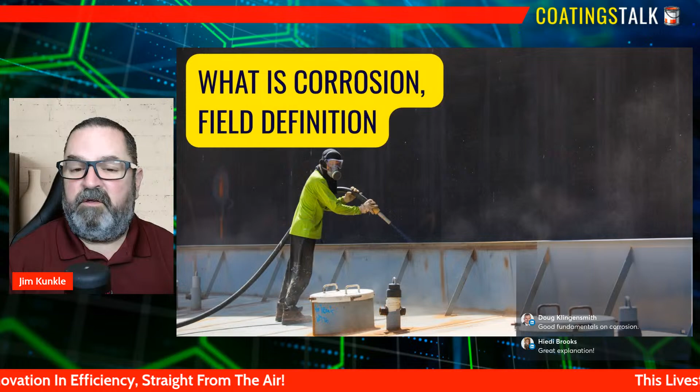Corrosion doesn't just happen, it happens when conditions allow it. And when field teams understand those conditions, they gain the ability to intervene early and effectively. Most importantly, corrosion is manageable, even in aggressive environments, even on aging infrastructure. The combination of trained eyes, good documentation, and disciplined maintenance practices keeps assets safe and operational.

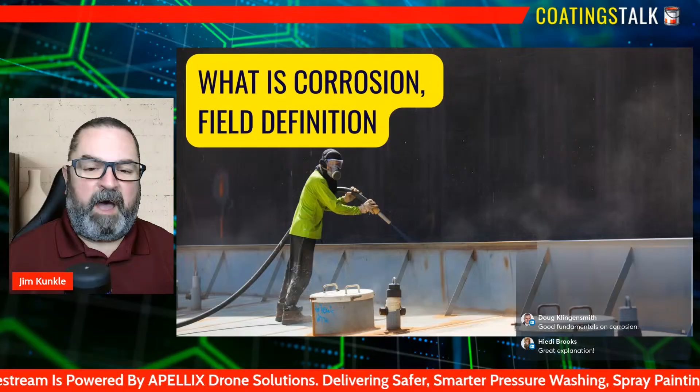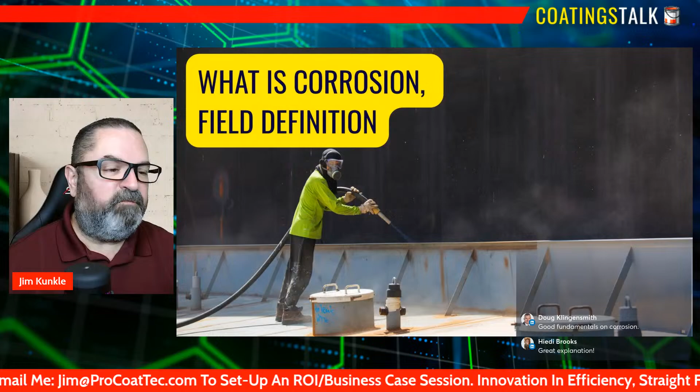Field level understanding turns corrosion from a crisis into a control variable. It empowers frontline professionals to protect the integrity of pipelines, tanks, bridges, and industrial systems with confidence. When teams recognize that corrosion is not fate, but a process they can influence, they become the strongest line of defense in asset preservation. So I'm going to cover what I consider my top 3 corrosion mechanisms encountered in the field.

The first one I want to talk about is uniform corrosion, and this is widespread surface attack. Uniform corrosion is one of the most common and most easily recognized forms of corrosion in the field, but it's also one of the most underestimated.

This mechanism occurs when the entire exposed surface of a metal corrodes roughly at the same rate, and it creates a widespread, even layer of metal loss. To the untrained eye, it may look like a simple, uniform rust film and nothing dramatic, nothing localized, nothing alarming, but that broad, consistent attack is quietly thinning the metal everywhere at once.

Over time, this steady reduction of wall thickness can compromise structural integrity. It can reduce pressure handling capabilities and also shorten the service life of tanks, pipes, and other critical components.

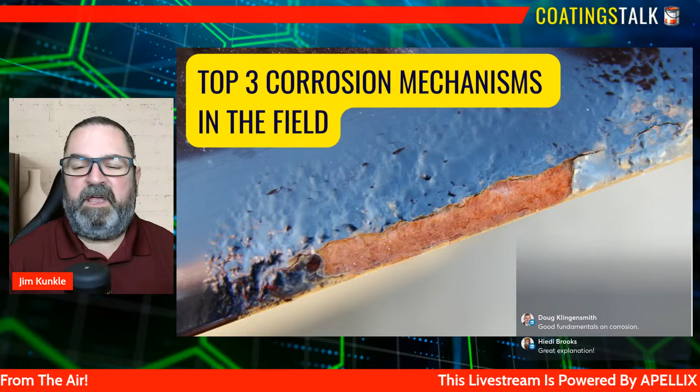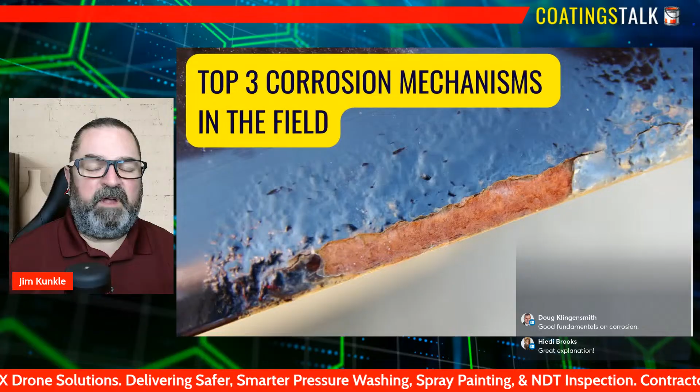What makes localized corrosion especially challenging in the field is how easy it is to escape detection. Pitting can form behind coatings, under insulation, behind gaskets, and in tight joints where inspectors can't easily see it or probe. Crevice corrosion often develops where two surfaces meet—lap joints, bolted connections, clamps, or deposits sitting on the metal. These areas restrict oxygen flow, creating a chemical imbalance that drives rapid attack. By the time visible signs appear, the damage may already be severe, with pits penetrating deeply or crevices undermining structural integrity.

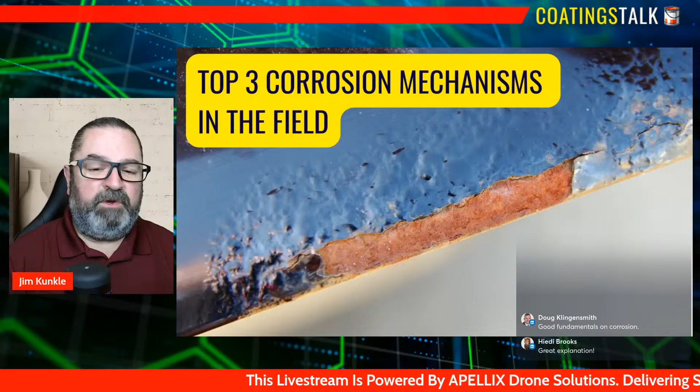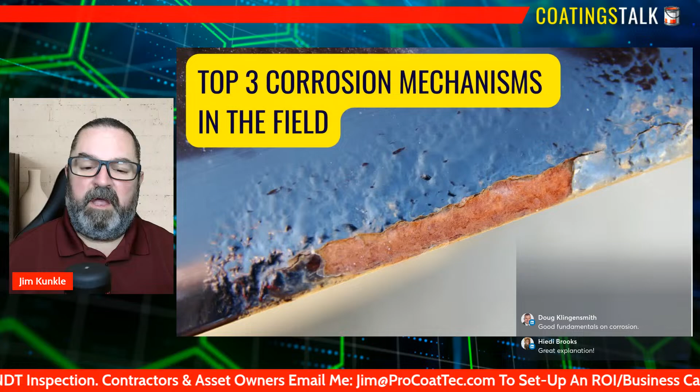For field professionals, understanding localized corrosion means adopting a mindset of vigilance. It requires knowing where these hidden threats tend to form, using the right inspection tools, and recognizing subtle indicators such as coating blisters, rust staining, or unexpected moisture. Localized corrosion may start small, but its consequences can be enormous, from leaks and unplanned shutdowns to catastrophic failures. When frontline teams understand how and where it forms, they gain the ability to catch these silent attackers early and protect critical assets before the damage becomes irreversible.

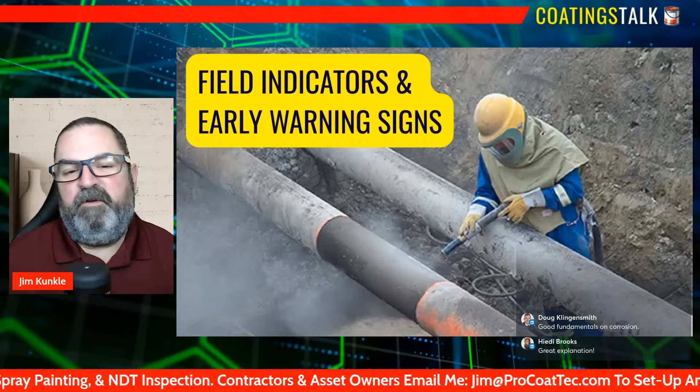Let's talk about field indicators and early warning signs—what inspectors and applicators should look for. Field professionals are the first line of defense against corrosion, as I said earlier, and their ability to spot early warning signs can make the difference between simple touch-ups and major asset failures.

Inspectors and applicators should pay close attention to subtle surface changes that often signal the beginning of corrosion activity. These include discoloration, dulling of the coating, small rust blooms, or areas where the surface texture feels rougher than the surrounding metal. Even minor blistering, pinholes, or hairline cracks in the coating can indicate moisture intrusion or underfilm corrosion beginning to take hold. These early cues are easy to overlook during fast-paced field work, but they are sometimes the most reliable indicators that the corrosion process has already started.

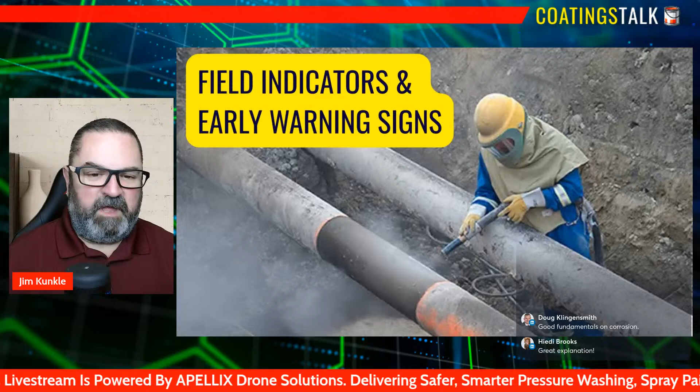Another critical area of focus is the presence of moisture, water traps, and environmental stressors. Inspectors should look for standing water, condensation, salt deposits, or debris buildup, all of which can create microenvironments that accelerate corrosion. Pay special attention to welds, edges, bolts, clamps, and areas where two surfaces meet, because these locations often experience higher stress and are more prone to coating breakdown.

Applicators should also be alert to improper surface preparation, inconsistent film thickness, or overspray that leaves thin, vulnerable spots. These application-related issues may not show immediate corrosion, but they set the stage for premature failures once the asset is back in service. By training the eye to recognize these early indicators, field teams can intervene before corrosion becomes severe, reducing long-term maintenance costs and enhancing safety across the operation.

Surface changes, coating failures, discoloration, and moisture water traps are always clues that corrosion can be beginning to take hold, and they're easy to miss if you're not intentionally looking for them. A surface that once appeared smooth and uniform may start to feel slightly rough, gritty, or uneven. You might notice dulling of the coating, small areas where gloss has faded, or subtle texture differences that don't match the surrounding metal. These early shifts matter because they may signal the protective barrier is being compromised.

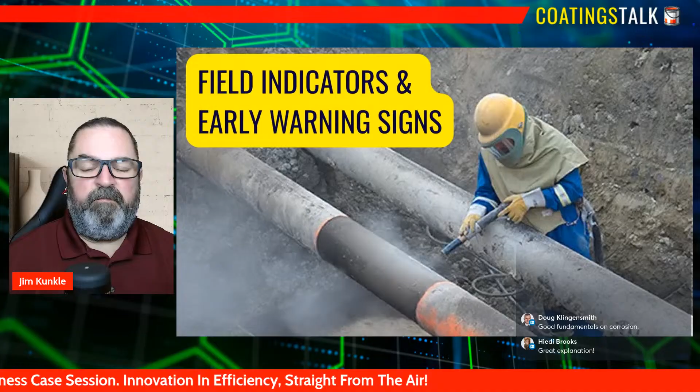Even minor discoloration, a faint orange tint, dark streaking, or unusual shading can indicate that oxidation has already started beneath the surface. When field teams learn to recognize these small changes, they gain the ability to intervene long before damage becomes severe. Coating failures are another critical early warning sign.

Blistering, pinholes, cracking, peeling, or lifting at the edges point to where moisture intrudes or there's a loss of adhesion. These defects may look small, but they create direct pathways for oxygen, water, and contaminants to reach the metal. Once this happens, corrosion accelerates quickly.

Moisture and water traps are especially dangerous because they create microenvironments where corrosion thrives. When you see standing water on horizontal surfaces, condensation under insulation, debris buildup, or tight crevices where moisture can't escape, these all contribute to rapid deterioration. These areas corrode faster than exposed surfaces because the trapped moisture keeps the electrochemical reaction active around the clock.

When inspectors and applicators train themselves to spot these early indicators - surface changes, coating issues, discoloration, moisture water traps - they dramatically increase their ability to prevent failures. These signs may seem minor in the moment, but they're the earliest, most reliable signals that corrosion is underway. Catching them early allows teams to take corrective action, protect the asset, and avoid costly repairs or unplanned downtime.

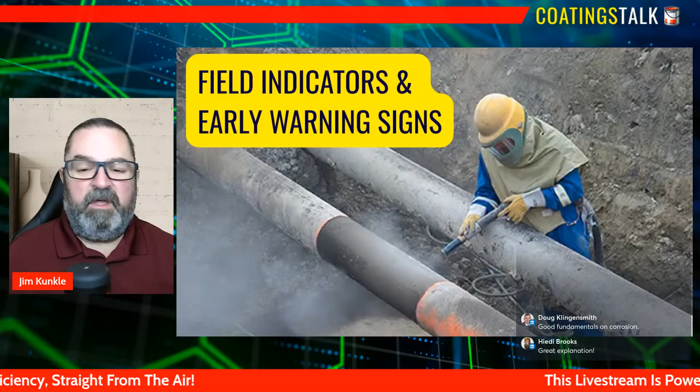It's important to document and take photos as evidence. Documentation and photo evidence are some of the most powerful tools a field professional can use to stay ahead of corrosion. Corrosion is a progressive process, and without a clear record of what the asset looked like last month, last season, or last year, it becomes nearly impossible to track how quickly conditions are changing.

Written notes, inspection logs, and timestamped photos create a baseline that helps teams identify trends - whether a small blister is growing, whether discoloration is spreading, or another moisture water trap is becoming more active. This historical perspective allows inspectors and asset owners to make informed decisions about maintenance timing, coating repairs, and risk prioritization.

Photo evidence also brings clarity and credibility to field observations. A well-taken image can capture details that words alone might miss - the exact shape of a blister, the depth of a pit, the pattern of rust staining, or the presence of contaminants. These visuals become essential when communicating with supervisors, engineers, coating manufacturers, or third-party inspectors. They eliminate uncertainty and ensure everyone is looking at the same reality. In many cases, photos can even prevent disputes by providing objective proof of conditions at the time of inspection.

Beyond internal communication, documentation and photos support regulatory compliance and audit readiness. Many standards require traceable inspection records, and photo evidence strengthens those records by showing not just what was found, but how it appeared in the field. When a company can demonstrate consistent, detailed documentation, it builds trust with regulators, clients, and stakeholders. Ultimately, strong documentation practices empower field teams, improve decision making, and help protect the long-term integrity of critical assets.

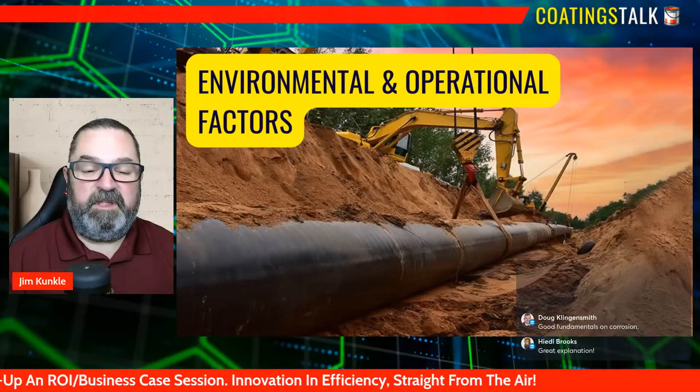Poor coating application compounds these design challenges. Even the most advanced coating system will fail prematurely if it's applied over inadequate surface preparation, contaminated steel, or inconsistent film thickness. Thin spots, overspray, missed edges, and improper curing conditions all create weak points where corrosion can initiate.

In many cases, the coating may look acceptable on the first day, but hidden defects like embedded dust, trapped solvents, or incomplete surface cleaning undermine the adhesion from the moment the asset enters service. When environmental conditions such as humidity or temperature are outside the recommended range during application, the coating may never achieve its intended performance, and this leaves the asset vulnerable long before its expected service life.

Together, design flaws and poor application practices create the perfect storm for early corrosion. Field professionals who understand these risks can better identify vulnerable areas, adjust inspection priorities, and advocate for corrective actions before failures occur. And this awareness transforms corrosion control from a reactive task to a proactive strategy, protecting both the assets and the people who depend on them.

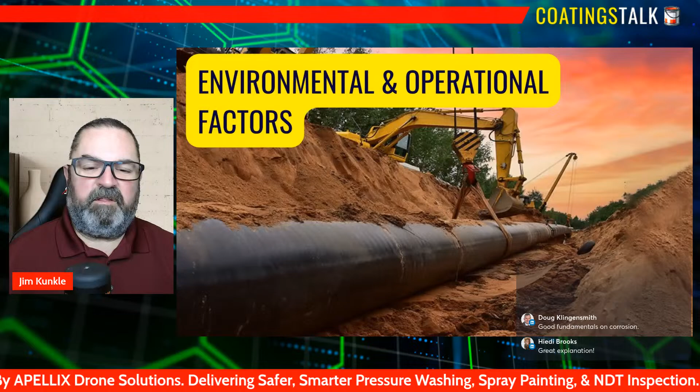So let's talk about coastal environments, because they're some of the harshest corrosion zones on the planet. And the field professionals working near the ocean, sea, and coast really see this firsthand. Salt-laden air carries chloride ions that settle on metal surfaces. They get into coatings and they can dramatically increase the conductivity of the moisture present. Even when equipment appears dry, salt can still pull moisture in from the air and keep that surface continually active, accelerating corrosion day and night. Coastal assets often show faster coating breakdown, more aggressive pitting, and higher rates of uniform corrosion compared to inland structures.

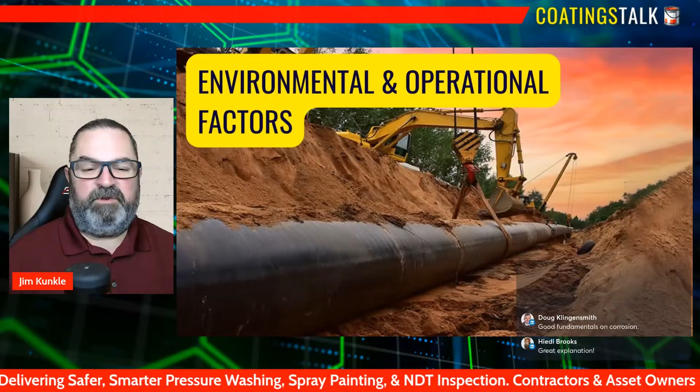In contrast, inland environments, especially dry or low humidity regions, tend to experience slower corrosion rates, but inland doesn't mean immune. Industrial pollutants, temperature swings, and moisture traps can still create highly corrosive microenvironments, especially around equipment that cycles between hot and cold or sits near chemical processing operations.

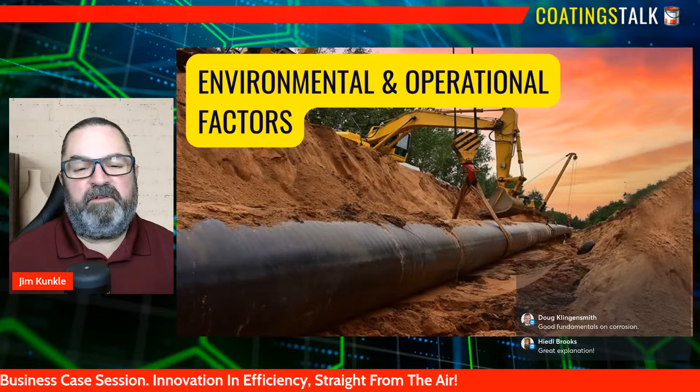Buried assets introduce a completely different set of challenges. Soil chemistry, moisture content, and oxygen availability all influence corrosion rates underground. Certain soils, such as those high in chlorides, sulfates, or organic acids, can be extremely aggressive, attacking steel even when coatings or wraps are present. Buried pipelines, tanks, and structural supports often corrode out of sight, making early detection difficult without proper monitoring systems.

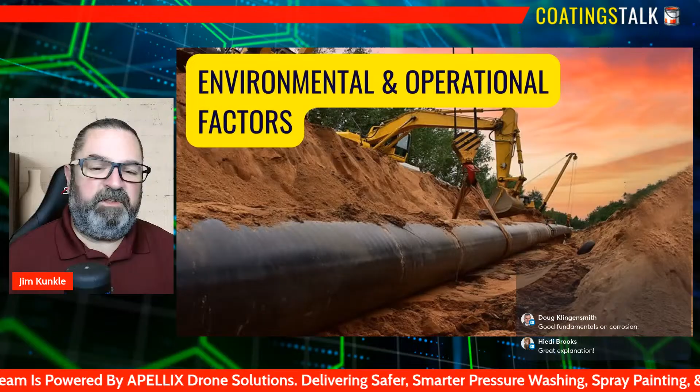On the other hand, exposed assets face direct environmental assault. UV radiation, rain, temperature fluctuations, and airborne contaminants all contribute to a coating's deterioration and ultimately lead to metal loss. Exposed structures like tanks, bridges, and above ground piping experience more visible corrosion, but they also benefit from easier inspection access. These field examples highlight why corrosion control strategies must be tailored to the environment and asset type. Coastal versus inland, buried versus exposed, each scenario presents a unique risk that frontline professionals must understand to protect assets effectively.

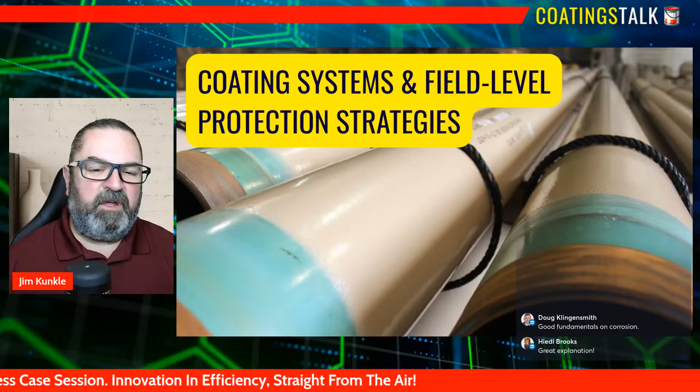So let's talk about coating systems and field level protection strategies. Coatings are one of the most effective tools that we have for interrupting the corrosion process. And understanding how they work gives field professionals a clearer sense of why proper application and inspection matter so much.

At the most basic level, coatings act as a physical barrier between the metal and the environment by preventing oxygen, moisture, and contaminants from reaching the steel surface. They break the electrochemical cycle required for corrosion to occur. And when the barrier is intact and properly applied, the metal underneath remains isolated from the corrosive elements that would otherwise trigger uniform corrosion, galvanic reactions, or localized attack.

This is why surface preparation and film thickness are so critical. Any gap, thin spot, or defect becomes a direct pathway for corrosion to begin. Beyond the simple barrier protection, many modern coatings incorporate active corrosion control mechanisms. Zinc-rich primers, for example, provide sacrificial protection by corroding preferentially to steel, effectively taking the hit and preventing galvanic corrosion

from attacking the substrate. Other coatings contain corrosion inhibitors that neutralize contaminants or slow down chemical reactions at the metal surface. Some systems are engineered to resist specific threats like chlorides in coastal environments or acids in industrial settings. When these systems are applied correctly, they don't just delay corrosion, they fundamentally change the environment at the metal interface, making it less likely for corrosion cells to form.

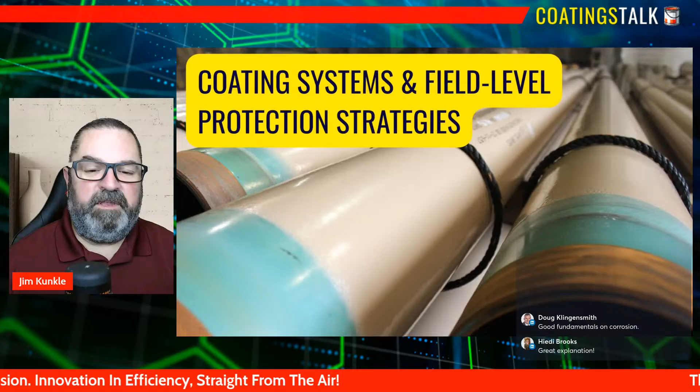So when it comes to surface prep, film thickness, and cure time, why do they matter? Surface preparation, film thickness, and cure time are the three pillars of any successful coating system. And in the field, they determine whether a coating becomes a long-term protective barrier or an early failure waiting to happen. Surface preparation is the foundation.

If contaminants, mill scale, rust, or salts remain on the steel, they create weak points where corrosion can immediately restart beneath the coating. Even the most advanced coating chemistry cannot bond properly to a dirty or poorly profiled surface. A clean, dry, correctly profiled substrate gives the coating something to bite into, creating mechanical adhesion strong enough to withstand service conditions. And when surface preparation is rushed or compromised, the coating may look fine on day one, but adhesion loss, blistering, and under-film corrosion often follow soon after.

Film thickness is equally critical because coatings are engineered to perform within a specific thickness range. Too thin and the coating lacks the barrier strength needed to keep moisture, oxygen, and contaminants away from the steel. Thin spots often occur on edges, welds, and complex geometries, exactly the areas that are most vulnerable to corrosion. Too thick and the coating may crack, trap solvents, or cure improperly, and this leads to premature breakdown. Achieving uniform, verified film thickness ensures the coating system delivers the protection that it was designed for, especially in immersion or high-stress environments. Cure time completes the equation.

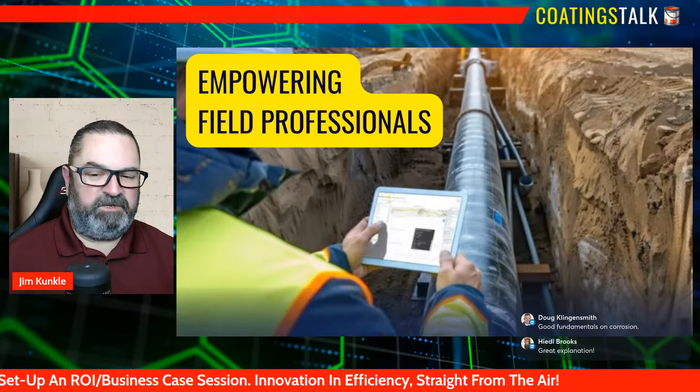Encourage training, certification, and communication. This is going to empower your field professionals to lead from where they stand. It also reinforces the idea that expertise grows through continuous learning and that the strongest teams are the ones who talk to each other, share insights, and collaborate across disciplines. When frontline professionals feel supported, informed, and connected, they become the driving force behind safer assets, better decisions, and more resilient corrosion control programs.